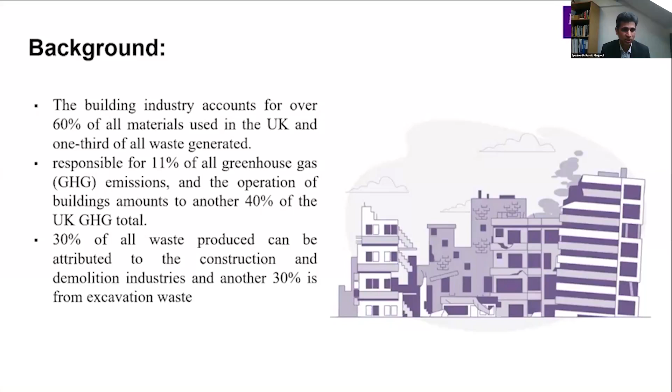Similarly, the last figure we can say is that 30% of all waste produced can be attributed to construction and demolition activities, whereas 30% of waste comes from other excavation activities. So a lot of waste and emission related activities are always there in the construction industry.

Okay, going towards building fit-out, which is one element of the overall construction industry. It is the most recurrent operation of different activities which goes on alongside the building life cycle. A normal size building is designed for a 50 to 60 year long period, and during that period a lot of internal design changes happen. Different researchers say differently; some experts claim it moves 15 to 20 times throughout a building's life cycle, with changes coming each 3 to 10 years.

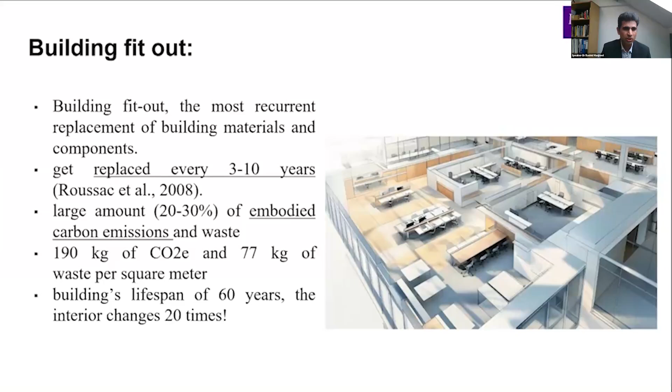All these operations take about 20 to 30% of embodied carbon, which is about 190 kg of carbon emissions, and 77 kg of waste production per square meter. There are a lot of figures which are quite drastic to think carefully about. So during the construction of a building, the emissions and the amount of construction waste is not as much compared to the operational stage, which leads to a lot of important questions to be addressed.

Going further, if we talk about what construction fit-out is, we can easily understand there are two categories, for those who don't know what fit-out construction is. One is Cat A, the other is Cat B. Cat A is a basic package, which we normally call a tenancy kind of fit-out: the site is ready and tenants can move in, design, and bring their own surface and material to use. Cat B is a more operational kind of package of fit-out, which is comprehensive, where design, surface, furniture, everything needs to be replaced within the fit-out construction. These are the two important categories we need to keep in mind.

Going further, there are four further classifications within this. One is shell and core, which is a very basic version that we need to understand.

The building is ready from the outer layer, it's the skin and the structure is quite complete, but inside it is not complete. It is not ready to move yet. It is a very basic version of the category of fit out.

When we talk about Cat A, I have just given my thoughts on it, and Cat B as well. Cat A plus is somewhere in between Cat A and Cat B, where surface is ready and partial refurbishment is required for moving towards a high level, where tenants need to upgrade it as per their own design, so they can make their changes to design and then they can fit alongside.

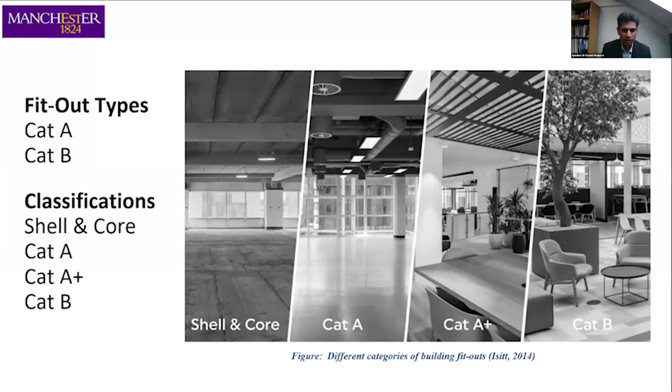So these are the four important operations where most of the wastages are produced, and these lead towards a lot of landfill and operational issues for the stakeholders.

Going to the next stage, about some stats which come alongside recent certification systems, quite prevalent in recent years. If we understand over here, the major figures throughout this process of fit out coming from the building fit out, causing 28% of emissions. Whereas building material, outer layer and structure is merely just 11% comparing to that bigger figure of operational stages, and then comes.

If we go to the left-hand figure, we can understand there are three parts. One is operational carbon, which is 50% of the total. Then comes a 25% portion of embodied carbon of interior material, interior furniture, interior design related operations. The last but not least is core and shell, which is overall structure and external design of the project, which leads to only 25%.

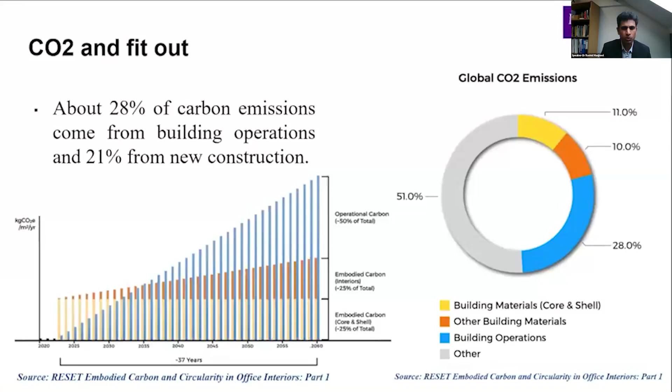These figures clearly highlight how much fit out operations activities lead towards a lot of emissions and waste production, which lead towards landfill and overall a lot of cost burden for the stakeholders. The last slide on the figures.

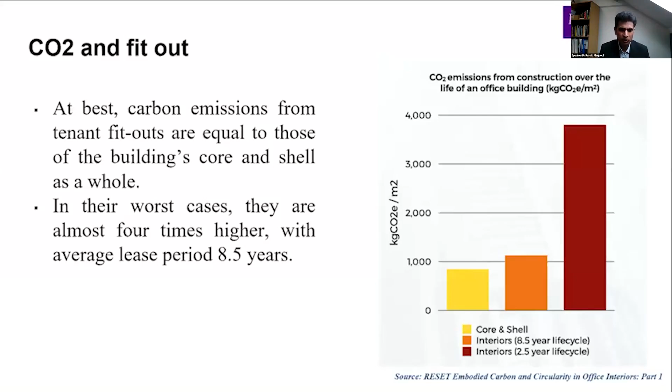So here the important stats we need to understand: when a tenant or tenant party moves towards any non-residential building, within 8.5 years, they cause waste production somewhere equal to core and shell. But in some worst scenarios, it can lead towards 4 times more than the external structure's waste production and emission control, which may lead to a lot of landfill and cost problems.

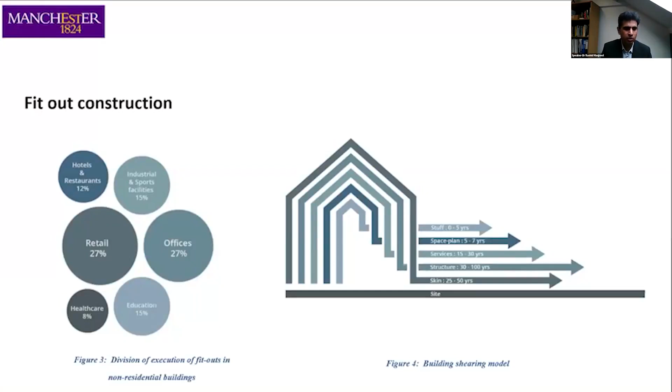So these are the figures for the 60 year time period, which are very much enormous in terms of managing waste. One thing we need to understand over here: the building industry, more specifically the fit out industry, works on 3 points at the moment: take, make and dispose. Nothing serious about reuse, recycle and refuse processes.

So these take, make and dispose categories are, we can say, very much clearly understandable in the 9R framework, where the propensity of linear economy towards circular economy is not much visible so far, although a lot of activities are happening across the world. But in the UK situation, this is not done clearly. So here we can understand the circular economy major principles of refuse, reuse and recycle. These 3 concepts, further divided into the 9 R's model, are not implemented.

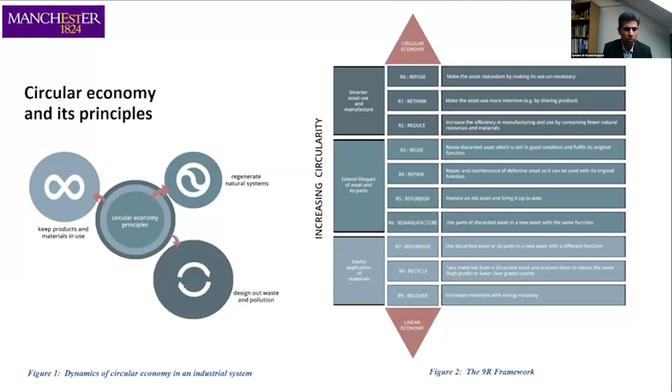But in order to get a better fit out environment and dynamics, these refuse, keep products and materials in use, reuse, regenerate natural systems, and recycle, design out waste pollution need to be implemented in a better way to get a better picture of fit out.

Going further, we have clearly seen landfill tax raised in recent years, and this can lead to the dumping process becoming more smooth with the heavy taxes. Basically we can look at figures, although dated, but we can understand each year's timeline of reducing waste dumping activities. So with the increase of landfill tax, these landfill activities are happening less and less. It is going towards the more circular side, but not completely what we can call the complete circular package — there is still linear activity happening.

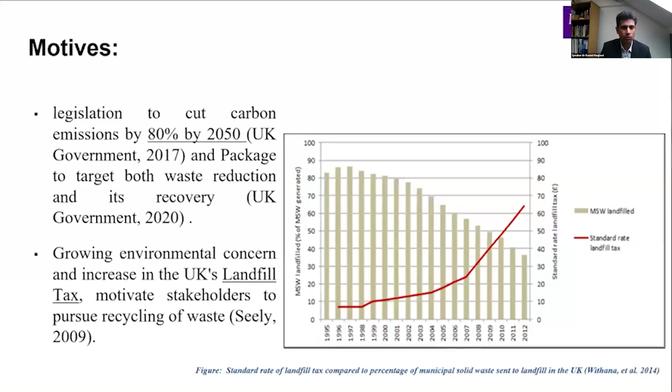Beside, if we talk about our research impression, we also take an idea from the UK Construction 2050 strategy. We have different set goals at the moment. The first and most important goal is to cut down 80% emissions by 2050, and it can hopefully also lead towards waste reduction and recovery. This is what the construction industry UK is aiming for in future. And an important element in this is landfill, and other activities, hopefully supported with modern technologies.

Going further, this is very much clearly, at the moment, as I talked about, the take, make, and dispose idea. This is what is so far implemented and prevalent in the construction industry. And again, the nature of the material basically makes the material not reusable so far, because as the material is produced, it can be implemented but not reused somewhere later on for other purposes.

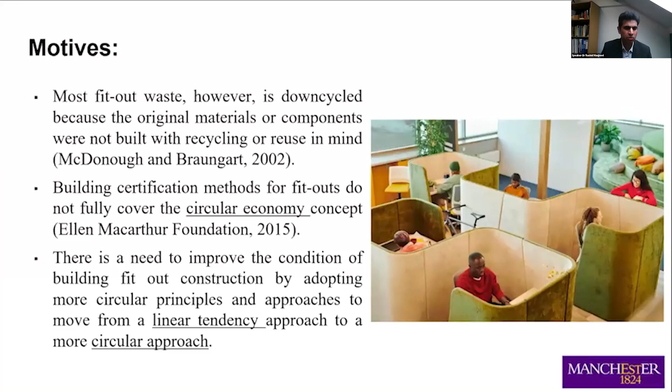At the same time, if we talk about building certification systems, environmental certifications, they have no clear rating systems in place, not openly available for the stakeholders, which could enforce these parties to implement circular processes. So considering these elements, it is important to consider circularity in the construction of building fit-out packages whenever there are non-residential buildings used, mostly for operational office and real estate purposes. So these need to be considered from a circularity point of view.

So considering this, if we talk about modern technology, one important point comes to our attention, which is BIM. BIM has important benefits. For example, it can help with accurate cost estimation, which can reduce unplanned costs and enhance cost control. Then it can help reduce time, mistakes, and efforts throughout the life cycle, which is quite understandable. Another thing, it can help designers understand real-time decision support data, which can lead towards sustainable objectives inside fit-out construction. This is what we observed recently.

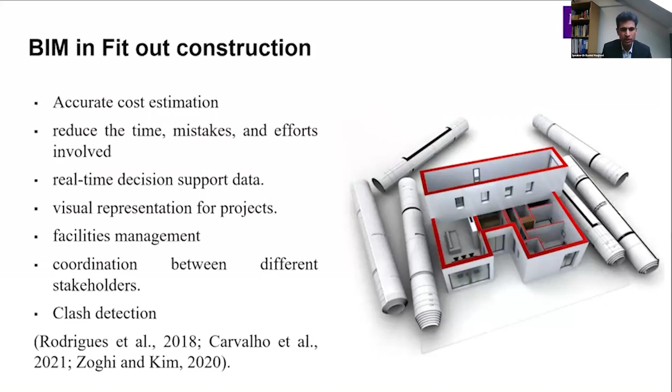Another benefit we can mention is 3D model visualization. It can lead towards better results for coordination, analyzing, and visualization, and easier handling of material. Then if we talk about facilities management, which is an important element of fit-out construction, it can lead towards lower and long-term expenses — that's what we can avoid with that point. And lastly, clash detection and coordination between different stakeholders, and proper documentation and design collaboration. So these benefits can help fit-out projects reduce time, cost, and emissions. These are the important points we can see.

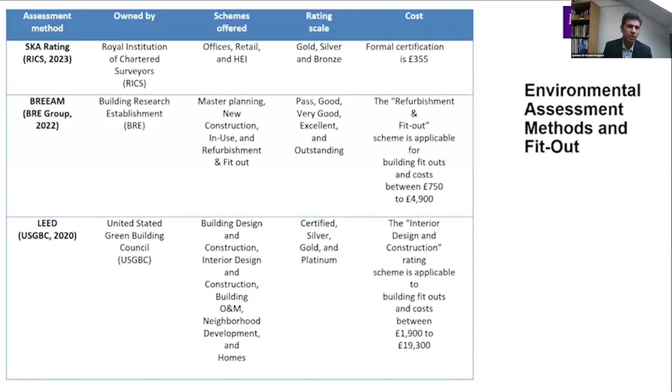So we also had a quick overview of all the available assessment tools in this project — these certification systems, for example SKA, BREEAM, and LEED. We could understand that although these certification systems can provide some guidelines on fit-out construction, they are not much clear. At the same time, cost is a big issue in implementing these throughout the process, and their handling whenever it comes to consultancy activities is difficult to implement. So that is basically the bigger problem at the moment in terms of the implication of this issue.

There comes a new work package alongside recently, for example the RESET standard, which is a data-driven standard. It helps with the support of data management, organizing, and controlling of activities, which is most popular at the moment, and it helps understand the life cycle throughout fit-out construction. This software is readily and freely available for parties, and it works mostly on three important components of embodied carbon. This embodied carbon works throughout building material sourcing, transportation, and construction activities. Then there's the RESET embodied circularity, which works on two important elements: source of life and end of life — the overall product of circular fit-out construction activities.

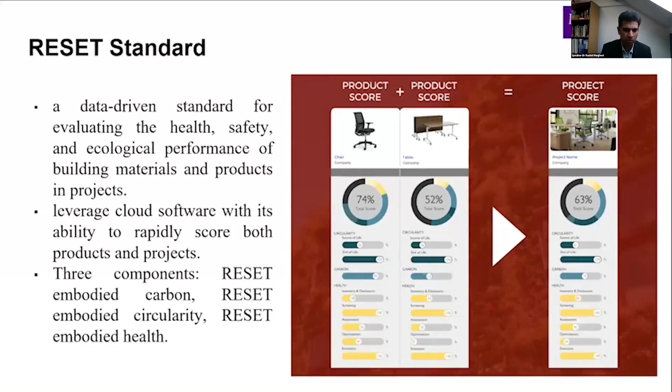The last but not least, which is more about chemical ingredients and chemical off-gassing of the material inside the activities. So this is how we can get a good benefit of these kind of packages, which provide visual pictures of the material and can help understanding better packages.

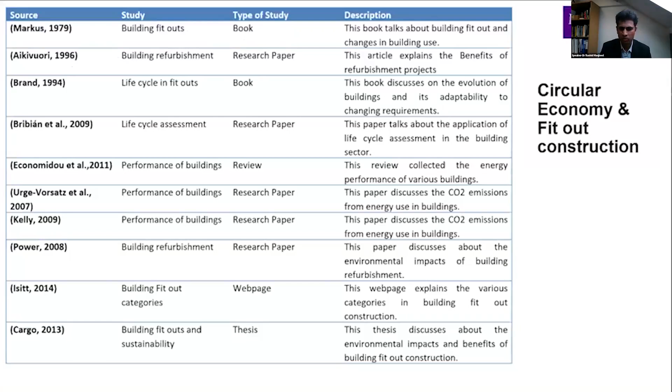So besides, we had a clear idea of circular economy activities in the construction industry. With the time limitation, I'm just quickly going through. So because of this, since these activities were part of the project, I thought maybe we can highlight.

After going through complete and comprehensive literature and pertinent theories, for example system theory to understand different important factors, resource-based views, intervention theory for the landfill hindrance impacts, and diffusion innovation, we developed our initial framework to test in this research.

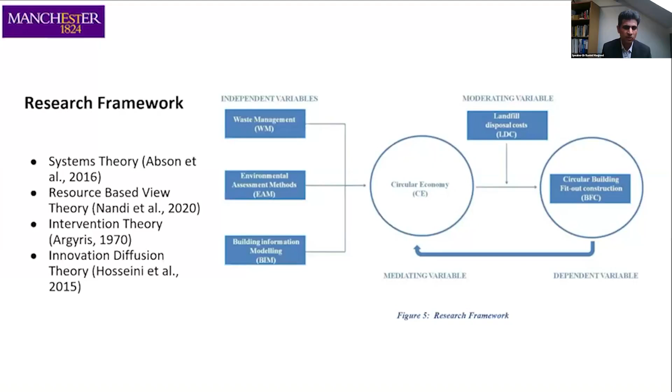This is what we covered in our project, and we try to understand these elements and how these can lead towards circular building fit out construction.

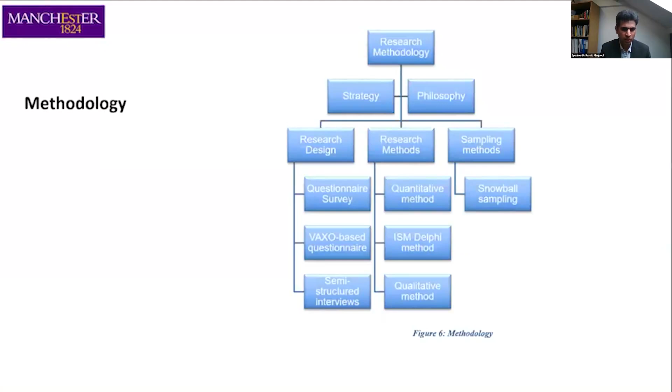So we used a triangulation of methodology using quantitative and qualitative views, where basically we used surveys, interviews, and then matrix surveys in our methodology.

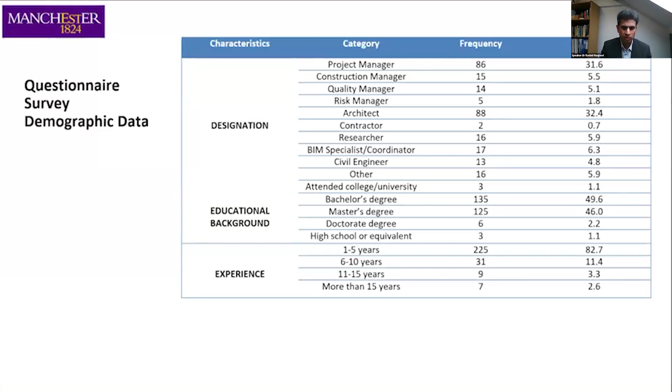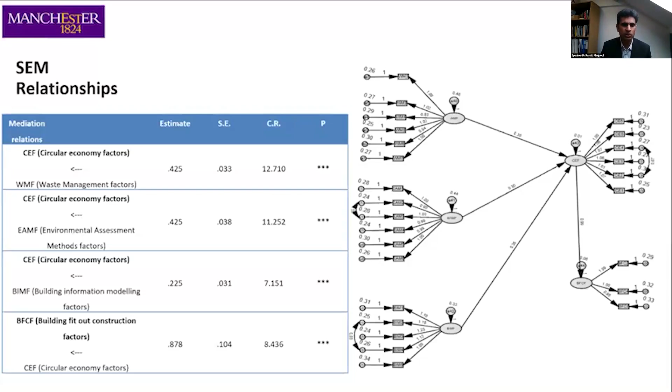Initially we try to understand the linkage between different factors. We can understand here all the factors have a significant impact on each other: waste management, building fit out construction, landfill cost, which clearly shows what industry thinks matches the literature. So there's no difference between our findings and literature thoughts.

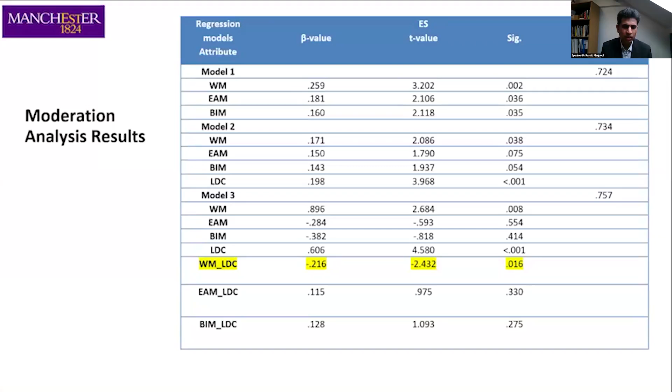There is a small difference we observed, which was not covered previously, as highlighted. Landfill cost has a hindering impact. It is putting a significant impact between waste management activities and circular fit out construction landfill, whereas it's not putting any impact between other factors like environmental assessment and building information modeling.

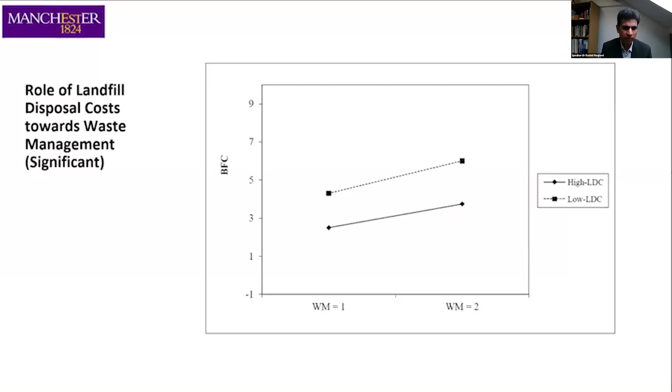So we can see the moderation impact of landfill cost is very important whenever different stakeholders think about waste management activities towards construction landfill operations.

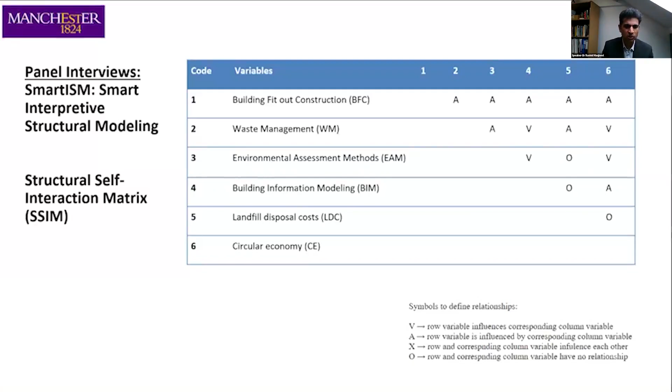Then at the second stage, we used a matrix structure for collecting data, and then through interviews as well. So we adopted this package to understand these 6 important points: fit out construction, waste management, environmental assessment method, building information modeling, landfill disposal cost, and circular economy, to understand the thoughts of different experts on these points.

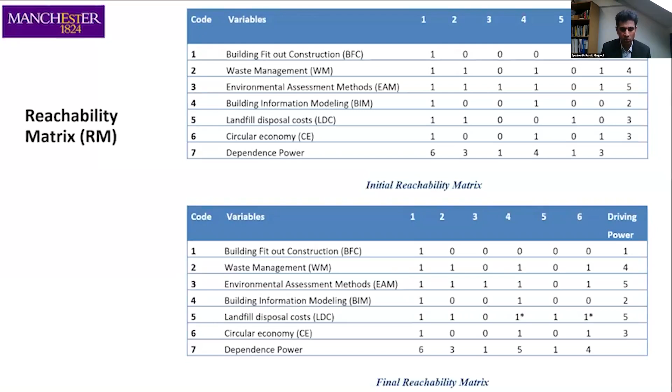We got 2 important ideas here. Industry thinks about 2 points: fit out is considered most important to them, whereas environmental assessment and landfill are believed to be the most impactful factors, compared to circular economy, waste management, and building information modeling. So the technological element is not much carefully considered by industry.

When we compare our final model to the initial model, it was very carefully understood. Building information modeling here, as per the final check, is understood as a central figure rather than an initial input.

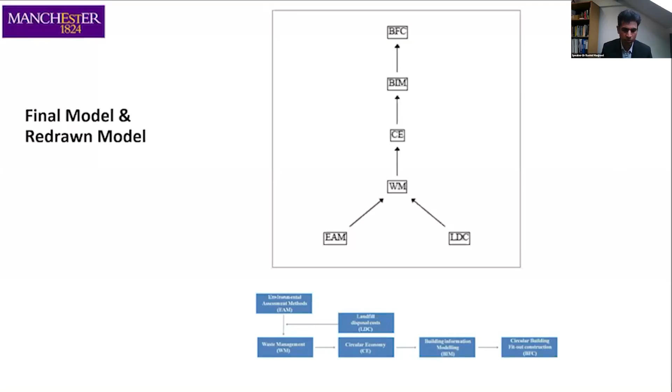So environmental assessment and waste management are considered the most important, leading towards circular building fit out construction, whereas landfill is a supporting figure, and building fit out comes as a secondary supporting factor, not comparing to how the literature initially says. So there's a small difference between our findings and the earlier available research on this topic.

Going further towards interviews, we used 4 experts' views here. Their profiles were more towards sustainability and construction project management. So we can see they were quite experienced in their fields, and it was very good to have their detailed view on the topic.

When we go through the findings of the transcripts, we could understand the central point for each of the experts was more related to waste landfill and construction, building recycling, reuse, whereas the technological element is not much covered in their idea. Sustainability is there as a secondary thought, but BIM and other ideas are not much covered in detail.

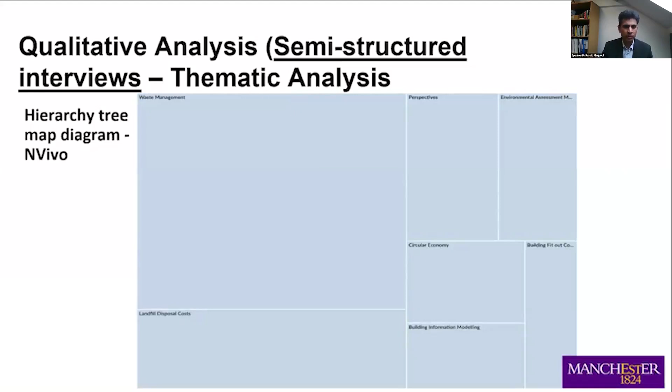The same goes with the tree map diagram here. Waste management and landfill are the most important elements. The reason is mostly these experts talk about the economical element, more about the costs for the construction points.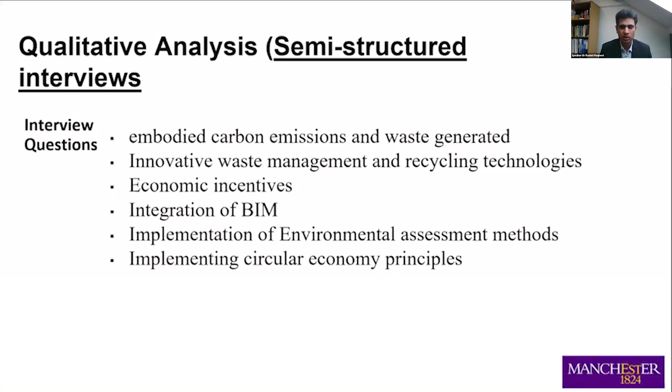Going for the interviews question, what we asked to the people, the important thing we can say is we asked about the embodied carbon element initially. And then we talked about the innovative waste management practices available, economic element, integrated BIM, and environmental assessment, and finally circular economy.

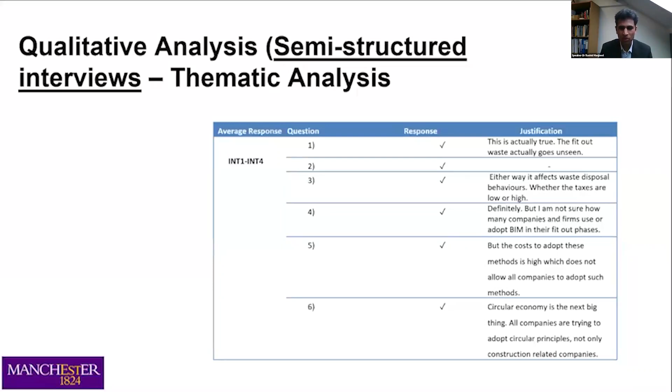But on the other element, it's still not clear why the BIM implications are not properly used so far. Finally, we go with the final thoughts on this work, what we did in this project. We could understand over here 4 important elements which lead towards a 5th important building fit out.

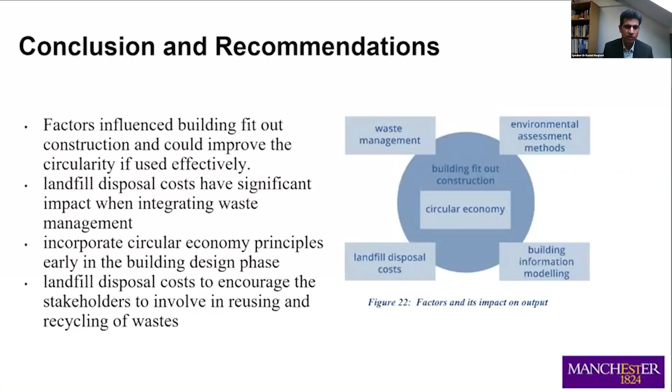It is what properly acceptable, whereas the technological element is not considered. Landfill is considered heavily significant by the construction industry, to be carefully considered whenever applying strategies, whereas circular economy principles need to be carefully thought about at the early stages of design, where basically stakeholders can carefully understand how later purposes these activities can be changed afterward.

And similarly, these activities can lead towards better disposal cost afterward. So we generated a few publications out of it, which are readily available, and readers can go and have a quick overview, as the time is limited, and I believe my time is over, so I can stop sharing my slide. Thank you, that's all.

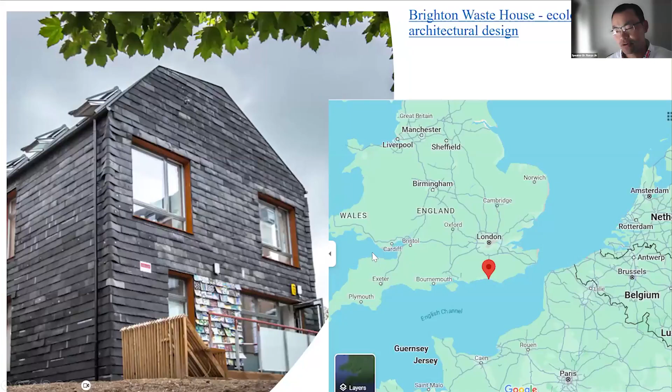Here is a quite well-known waste house, claimed to be 99% from all kinds of different waste materials. It's called Brighton Waste House in southern England. It's an award-winning project that created quite a good social impact from a colleague in architecture in southern England. Getting into the waste house, you can see all kinds of slogans apart from the reclaimed materials.

You can see the wood, the plastics, even some urban solid wastes from daily life. For example, the toothbrush, the duvet, they have all been adopted as reused materials to build this waste house. And you can see these slogans, eco-build, all kinds of slogans.

In the UK, we generate around 120 million tons of waste. In construction, demolition, and excavation, you can find the data from the UK government: up to 60% of the waste could come from construction, demolition, and excavation in the UK. Although we have achieved over 90% of reuse or recycling, in terms of the circular economy hierarchy presented by my colleague Dr. Rashid, the former presenter, we have up to nine different levels in the circular economy hierarchy.

So we have achieved the 90%, but a lot of it still falls in the down-cycle category, just barely avoiding being sent to urban landfill. There's still lots of potential; we can achieve a higher level of upcycling in the circular economy hierarchy.

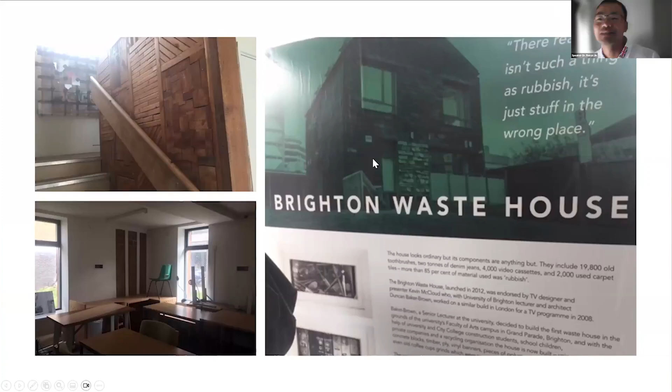There are lots of slogans, or the philosophy if I can call it, in this waste house. There really isn't such a thing called rubbish or trash, it's just the resource that has not been put in the right place. That's the philosophy of waste management professionals.

This next slogan, we used to say half seriously, half jokingly, between academia and industry in England: every 5 houses we build in the UK, 1 house's worth of material is wasted. It's a very inaccurate estimate of a 20% waste rate - 5 houses built, 1 house wasted. We've been half serious, half joking.

Starting from my career, when I started as an early career researcher, that was one of my publications back in 2017, from a field trip site investigation and stakeholder investigation back in 2017. That is a table from multiple secondary sources mapping between different countries or regions, including Japan and more developed regions like China, in terms of construction and demolition waste recovery rate. I often look at other countries' available secondary data from published sources, for example Japan's waste recovery and how they formed their own market-driven waste recycling and reuse approach, as compared to other countries with a top-down, policy-driven or conformance-driven approach to enforce or provide incentives for waste valorization.

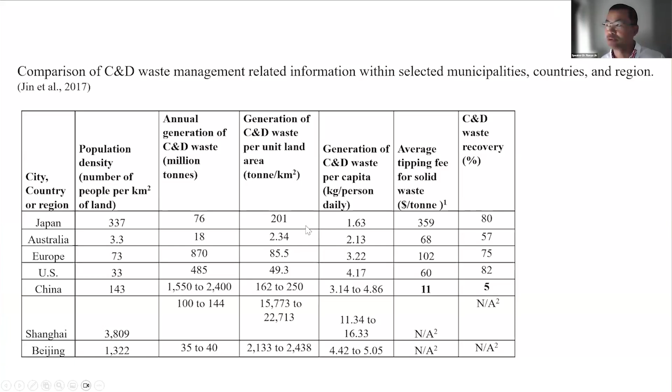That is a field trip where I took photos on site, speaking to manufacturers and business owners, a small SME or family business in China - that is their business model. On the eastern coast of China, they have quite a lot of demolished buildings, maybe only 30 years old, and the debris from demolished buildings, like in many parts of the world, is often mixed with red bricks, concrete, maybe some other plastics, glasses, or all kinds of waste.

It's always difficult to segregate the wastes, so that's one of the worldwide issues. I don't think we even have well-developed technology today to separate the different wastes from the beginning stage of demolition. So often we mix everything, because separating all the wastes is very energy intensive and labor intensive. So basically what we've been doing, even here in the UK, is crush everything into smaller pieces, filter or wash it, and make recyclable or reusable aggregates for reuse in recycled products like bricks or masonry blocks. And of course, we have to meet the national standard to make the final products.

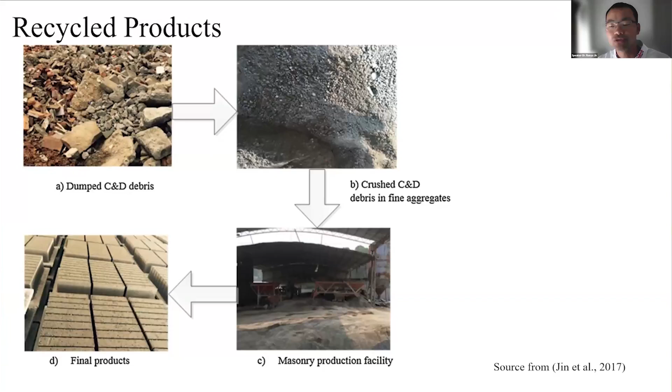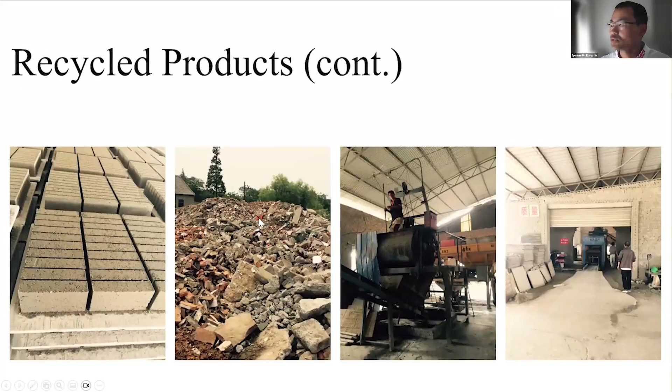So this business model, this production line, gets dumped waste from the dumper. This manufacturer, this business, charges them for dumping their wastes. But on the other hand, they make the product and sell it back to the market, so they charge the customers too. They charge at the source and charge for the final product - it's a business model, and a small business at that. You can see more photos I took from the crushed sources into the final solid bricks or hollowed bricks, from the source through treatment into the final products in this business model and production line.

Some background: after 2017, I moved from China to the UK. So we're talking about decarbonization everywhere, like in the UK, and as some background information has been provided by Dr. Rashid - cement is widely used but very energy intensive, with huge embodied carbon in its manufacturing process. Statistically, for each kilogram or ton of cement produced, nearly the same amount of carbon dioxide is emitted - nearly 1-to-1 per unit of cement manufactured. Nearly the same amount of carbon dioxide is released to nature.

And cement itself can contribute up to 7 or 8% of all carbon emissions across all industries, so it's a huge influence building material. For this reason, you can see numerous work in industry, in academic research, laboratory work - lots of work sharing the latest results on decarbonized cement or replacements for cement.

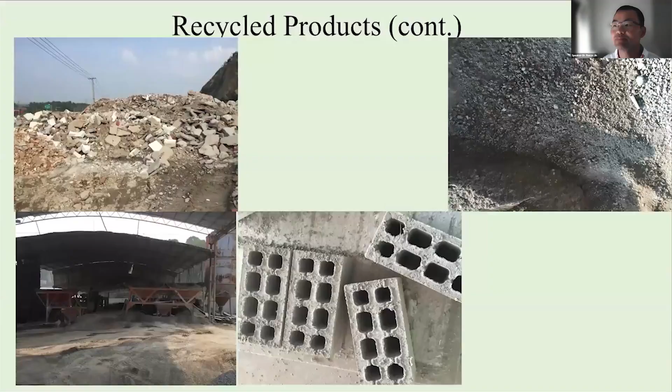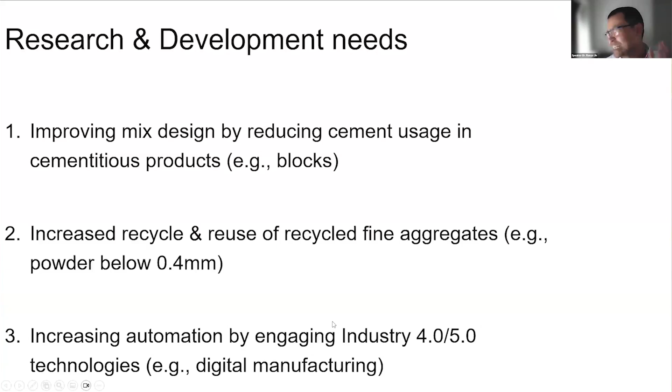There's a lot of work in this area, but to me it's more like a methodology to adopt digital transformation and AI for the purpose of valorizing the wastes. So that's why I say to me it's a tool, a technology, a platform, a methodology - but the subject itself is waste valorization in all my presentations.

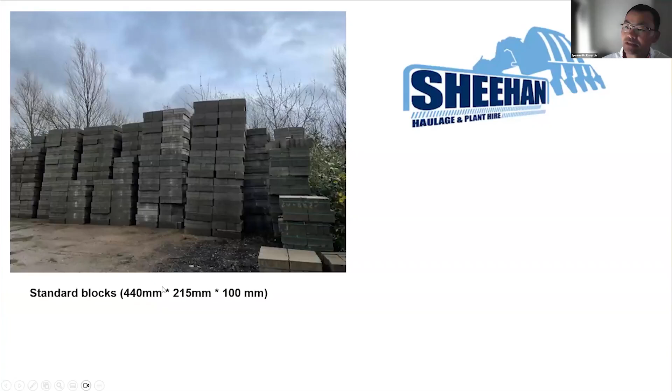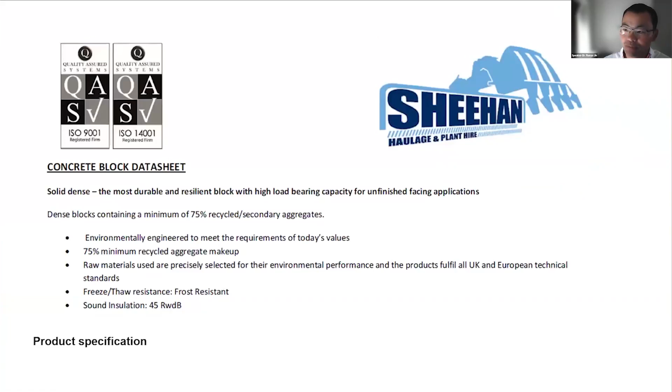We can find across England quite a few family businesses adopting bricks or blocks meeting the national standard - that's the national standard of blocks in the UK. It adopts 100% recycled aggregates from locally demolished buildings or construction demolition waste, all available on their business websites - 75% or 100% recycled aggregates. We also collected some of the waste for our laboratories.

Apart from cementitious materials, another type of material - timber or steel - these are also widely used construction materials worldwide. So that's a circular economy, a loop, a circular economy cycle, whether we can reclaim existing steel for reconstruction in structural design.

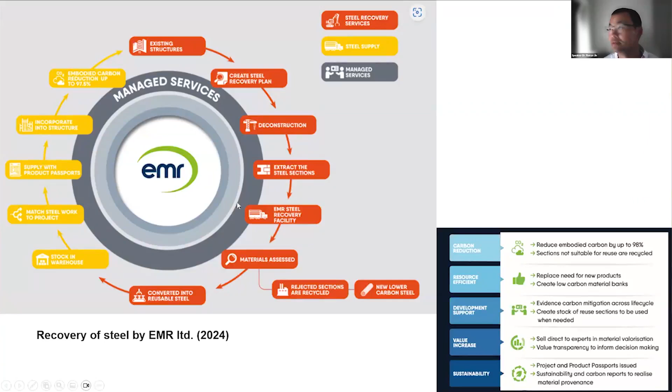Okay, that is another latest practice. So again, AI or digital transformation has been a really emerging area in recent years. It's also been applied to construction and demolition waste, including some universities adopting AI technology to detect structural risk due to older structures.

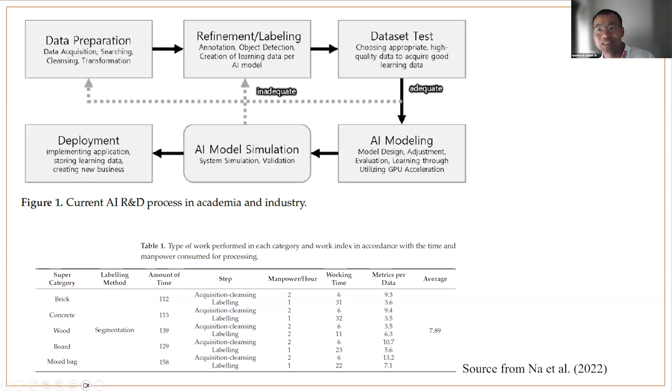Some of the latest peer-reviewed papers talk about the current gaps in adopting AI for construction demolition, starting from the early stage waste sorting and detection of different types of waste. That has always been a global challenge: how we detect, classify, and separate the wastes from demolished debris. You can find lots of existing studies from the literature review.

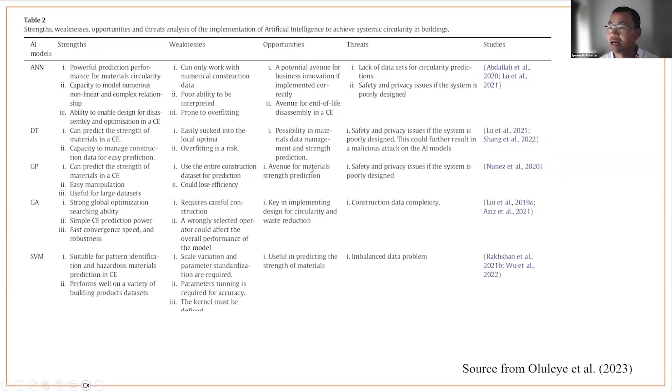In the past decade, you can also find a lot of studies on how to adopt BIM. Now we are talking about from BIM to digital twinning, from BIM to blockchain, or from BIM to AI, integrating BIM with AI and the latest digital technologies for construction demolition waste valorization, starting from early stage building design to estimate waste generation or detect different types of waste. We can also see some work studying adoption of VR to simulate the end of service life of the building, to simulate the best way to deconstruct rather than demolish.

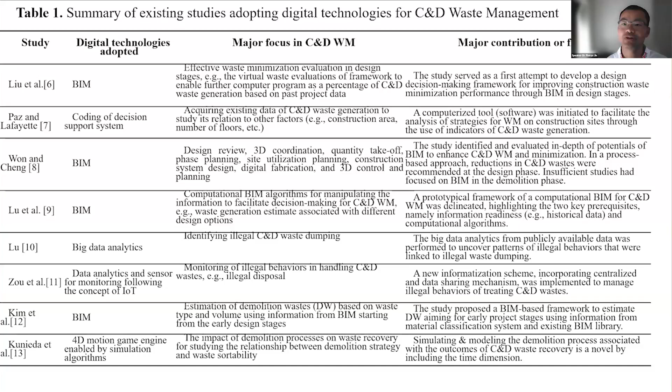As we can see, demolition is also the baseline to totally demolish the building, but there are other options: partial demolition, refurbishment, repair, or fit-out construction, as Dr. Rashid has focused on with different ways. And what is the optimal way? So certainly there's a lot of work going on.

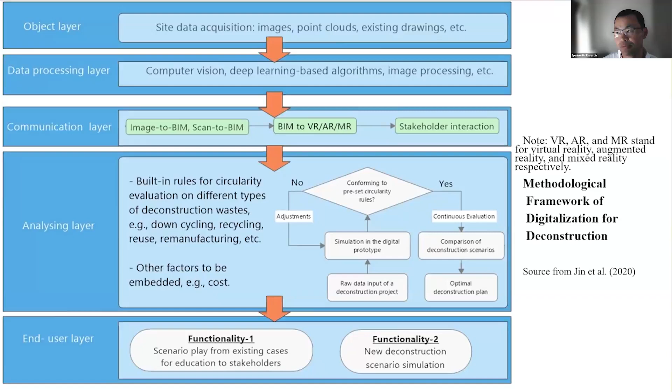I propose a methodological framework integrating digital AI data analytics into the circular economy for waste valorization, especially for the end of service life of buildings. These are some of my architecture designs for the circular economy platform in some of my recent proposals.

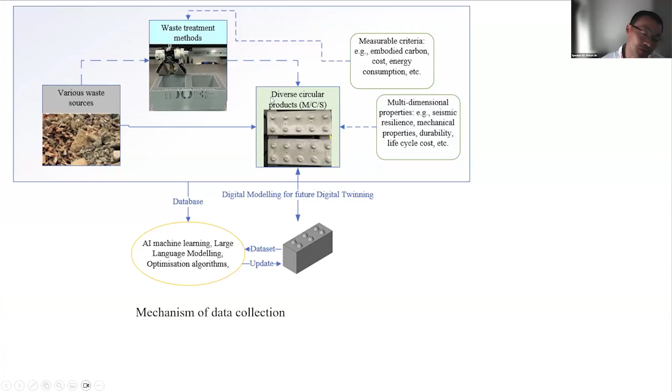Specifically, I divided from the waste source: one is the source, the other is the final product. In between, there's a treatment method, how you treat it according to different levels of circular economy that can come up with different types of products. So it's from process to product. A lot of work we still need to carry on.

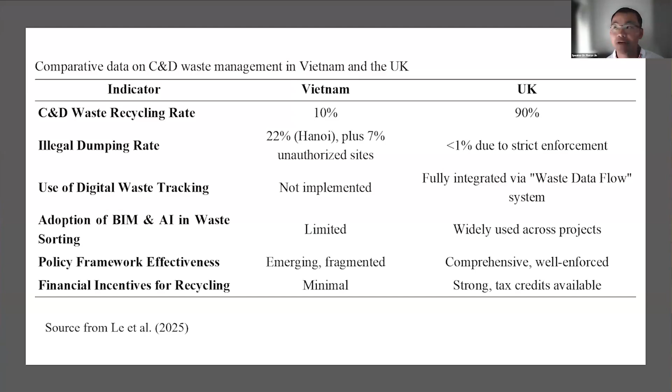In terms of my vision in circular economy, the digital circular economy hub, I'll be presenting some papers based on international mapping between Vietnam and, because I have quite some connection in recent years with Southeastern Asian countries like Vietnam, Thailand, and extending to other ASEAN countries regarding their national strategy of circular economy in waste valorization.

At the same time, we have secured some funding to attract early career researchers. In recent years at my current institution, I have secured research fellows working in the area of construction waste management across multiple dimensions. Some are focused on material and structural engineering, testing and evaluating products made from waste sources. Some come from a social science background in an interdisciplinary perspective. Some are more in environmental science, and some are more in social science or structural civil engineering.

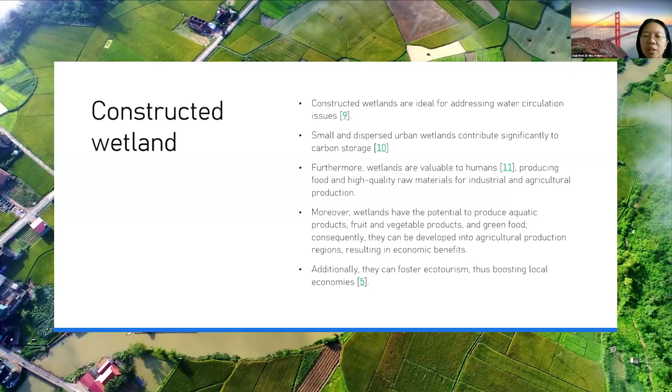Constructed wetlands are ideal for addressing water circulation issues, and small and dispersed urban wetlands contribute significantly to carbon storage. Furthermore, wetlands are valuable to humans for producing food and high quality raw materials for industrial and agricultural production. Moreover, wetlands have the potential to produce aquatic products, fruits, vegetables, and green food. Consequently, they can be developed into agricultural production regions, resulting in economic benefits. Additionally, they can foster ecotourism, boosting local economies.

Although wetlands provide numerous benefits, they are frequently threatened by human activities such as drainage, construction, pollution, overfishing, resource overexploitation, introduction of invasive species, and the impacts of climate change. Wetland parks are natural or artificially formed parks that combine wetland ecological functions with typical park features, achieving the goals of environmental protection, science education, leisure, and recreation. Since wetland parks produce a certain proportion of wetland area, they have important functions in conserving water resources, purifying water, storing floods, controlling flooding, regulating regional climates, and increasing biodiversity.

Wetland parks feature a combination of resource protection and rational utilization of the wetland ecosystem, which includes safeguarding and using key resources such as biological resources, like wild animals and plants, as well as cultural resources.

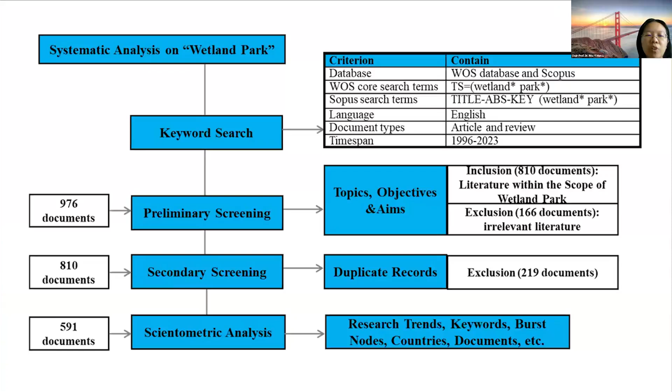For this research, we tried to conduct a systematic analysis of wetland park research in the past. We utilized data from the Web of Science (WOS) and Scopus with the terms wetland and park, testing only English articles published between 1996 and 2023. We conducted preliminary screening, secondary screening, and scientometric analysis. Eventually, we got only 591 papers after the screening process. You can see that there has been more and more research over the years, and in 2022, for example, there were 80 papers.

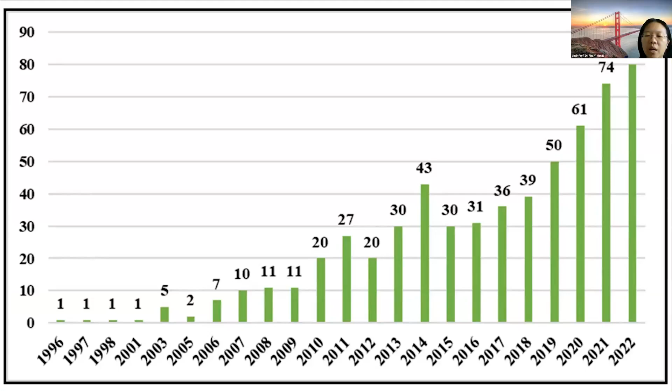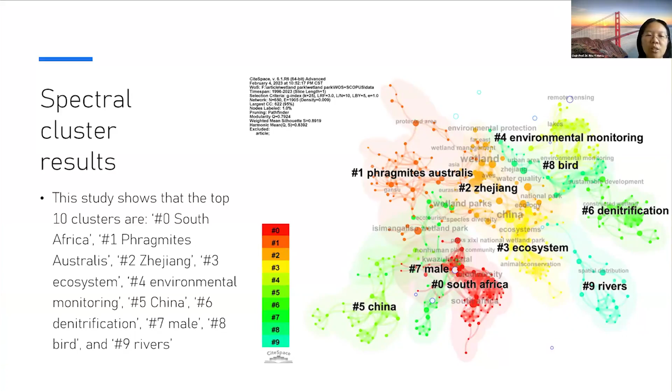For the spectral cluster results, you can see the top 10 clusters include South Africa, Phragmites Australis, Zhejiang, and ecosystem environmental monitoring, China, etc.